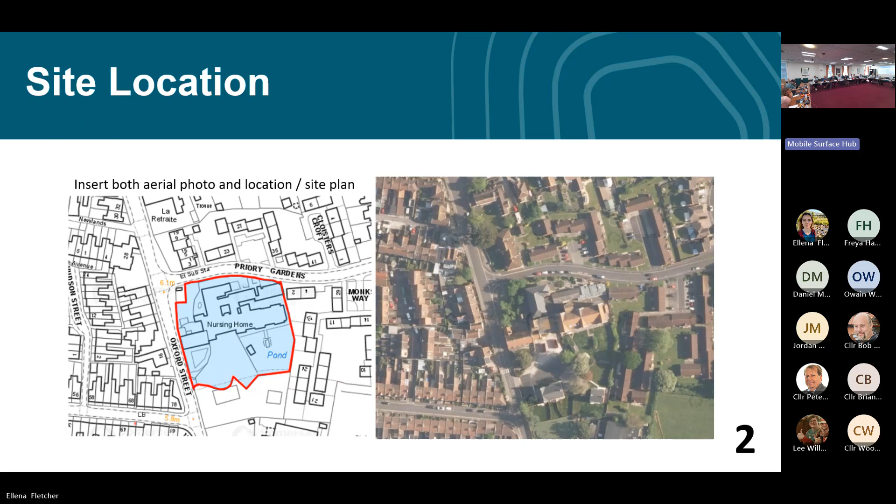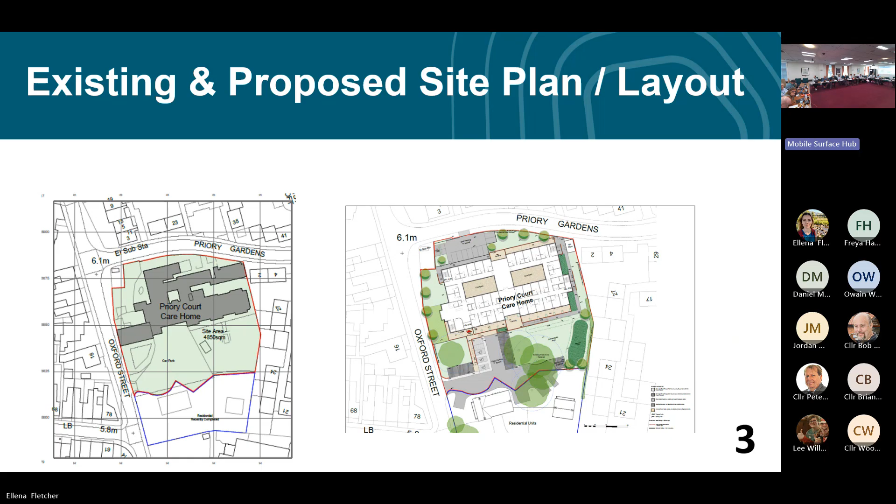This slide shows the context of the site as a reminder. It's within the town centre of Burnham-on-Sea, surrounded by a number of residential properties. As you can see, the aerial to the right indicates the existing buildings on the site and the surrounding properties. And again, the plan on the left indicates the existing footprint of the existing buildings, and the proposal is the plan on the right-hand side.

Now, these slides are the slides that have been really helpfully provided by the applicants. So I'm going to just run through them so that you can see what's been shown as existing and what's being demonstrated as how the proposal incorporates some of the existing features.

In terms of windows, the existing windows include a vertical emphasis with varying transom and mullion arrangements with stone and brick header details, stone sills and varying dimensions and proportions. The proposal, on the bottom of the slide, includes, again, vertical emphasis in the design, contemporary arrangement of transoms and mullions to suit natural ventilation and daylight strategy. It includes cast stone header details and cast stone sills as part of a band course.

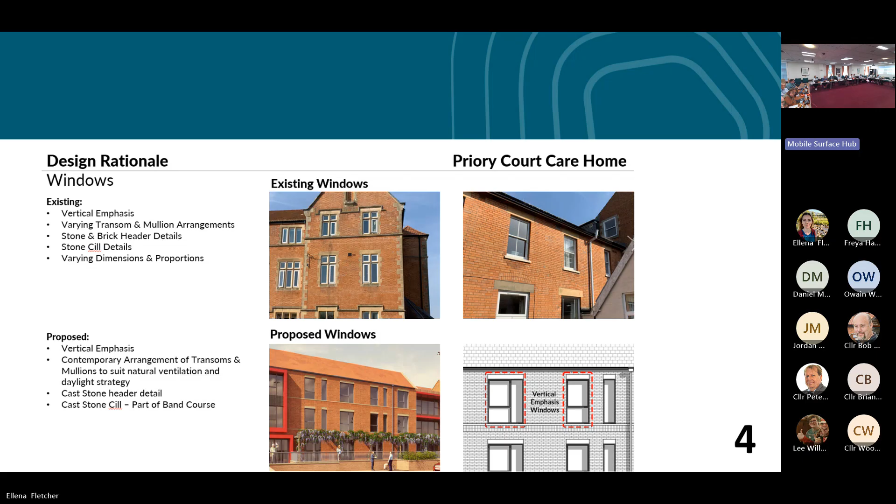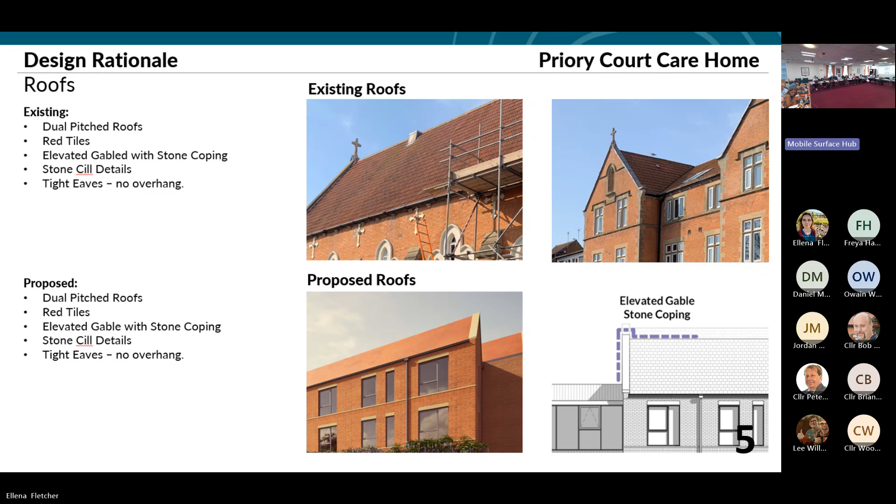The next slide indicates the roof designs. Existing designs include dual pitched roofs, red tiles, elevated gables with stone coping, stone sill details and tight eaves, meaning very little overhang of eaves. What is proposed is dual pitched roofs, red tile, elevated gable, stone coping, stone sill details, and again, tight eaves.

In terms of wall and fenestration details, existing, we have projecting stone band courses, stone quoins, brickwork soldier headers, Flemish bond style brickwork with coloured mortar, ecclesiastical details to the chapel. What is proposed incorporates projecting stone band course, brickwork soldier course, stone headers to windows and Flemish bond brickwork with coloured mortar.

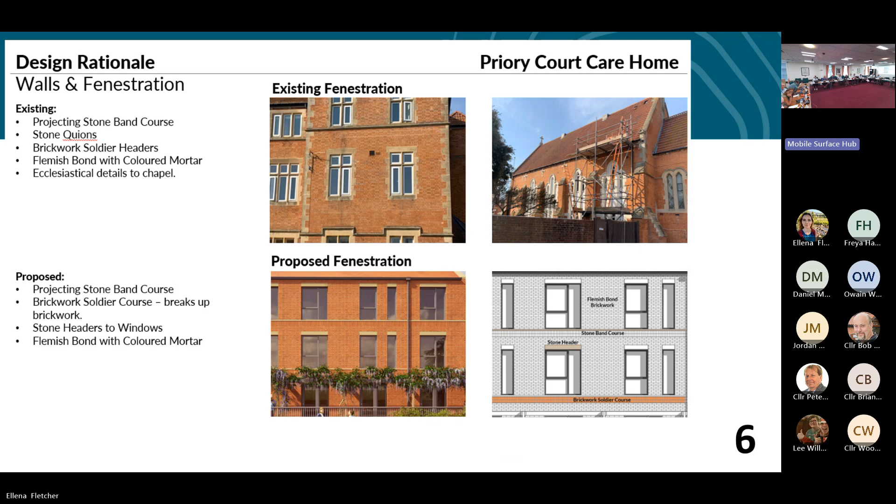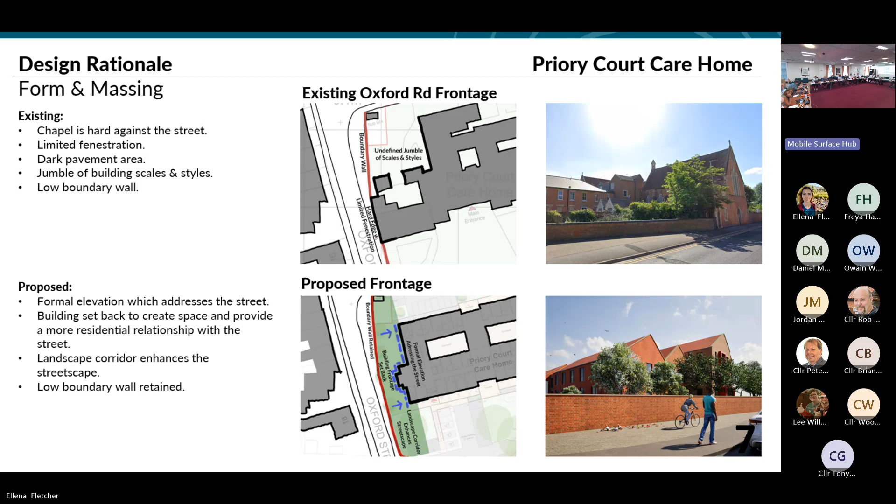In terms of form and massing, the existing indicates the chapel being close up against the street with limited fenestration, dark pavement area, a jumble of building scales and styles with a low boundary wall. The proposal incorporates a formal elevation which addresses the street, building setback to create space and to provide a more residential relationship with the street, a landscape corridor to enhance the streetscape, and a low boundary wall to be retained.

In terms of the form and massing of the elevations, as you can see at the top, the existing incorporates a south elevation arranged into three main sections. Gables are prominent features, and there's relief and shadow across the elevation. What is proposed incorporates an arrangement of three sections with street elevation including prominent gable features. The gables are arranged with low eaves to reduce mass and impact. The valleys are kept higher to allow for servicing. Setbacks across the elevations create shadow and depth, and material variation helps break up the facade.

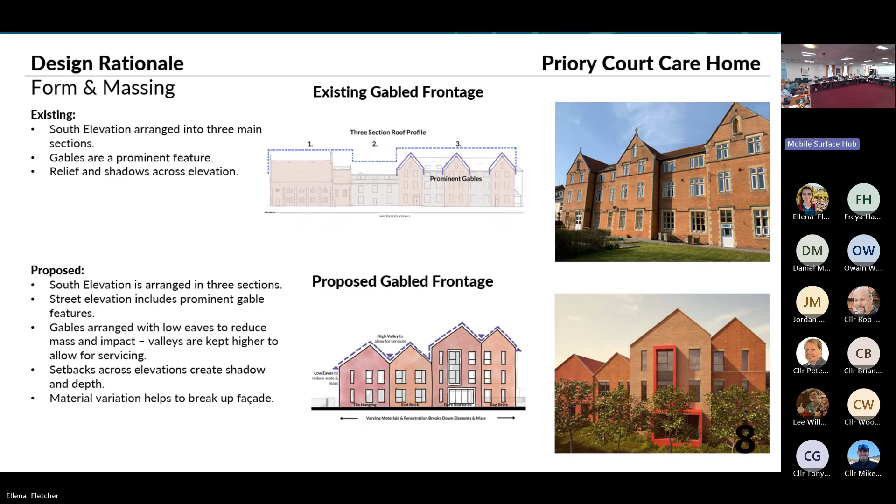Given the details proposed and given the proposal as previously recommended, it is considered that the design features incorporated in the scheme are acceptable, and the recommendation is to grant consent as was previously recommended. Thank you, Chair.

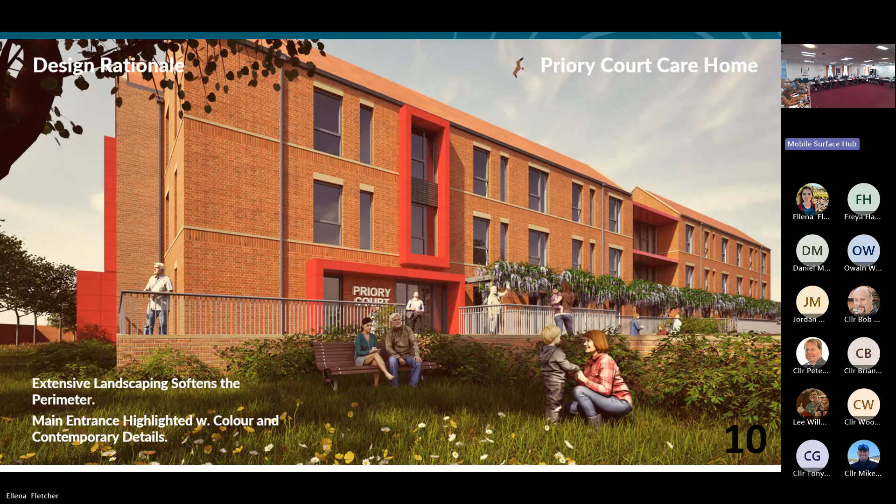Hello everyone, my name's Owain Wynn and I'm speaking on behalf of the Diocese of Bath and Wells. We own a property in the newer houses that were built, 17D. Our main concerns are to do with the loss of the historical character of the area, detrimental impact during demolition from dust, noise and pollution, inadequate parking due to the number of people who will be living there, working there, and visitors. There's also the overall impact on all the neighbouring houses, and some issues with the whole development regarding principles that the council generally have on developing. There are multiple issues at the moment with the security on the site and how the site has been managed.

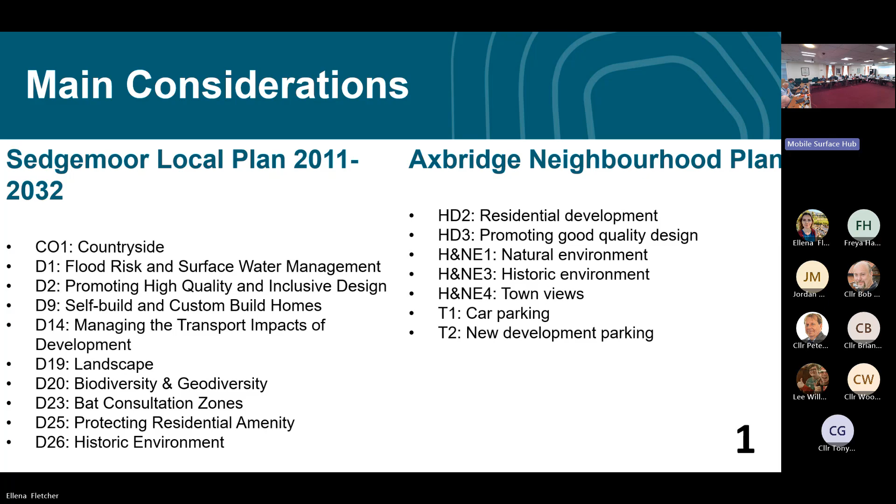So this is the list of the relevant local plan policies. There is also a neighbourhood plan in Axbridge as well, and these policies are relevant. There are also some supplementary planning documents relevant to this scheme, and also the main planning considerations that we are going to look at in the presentation.

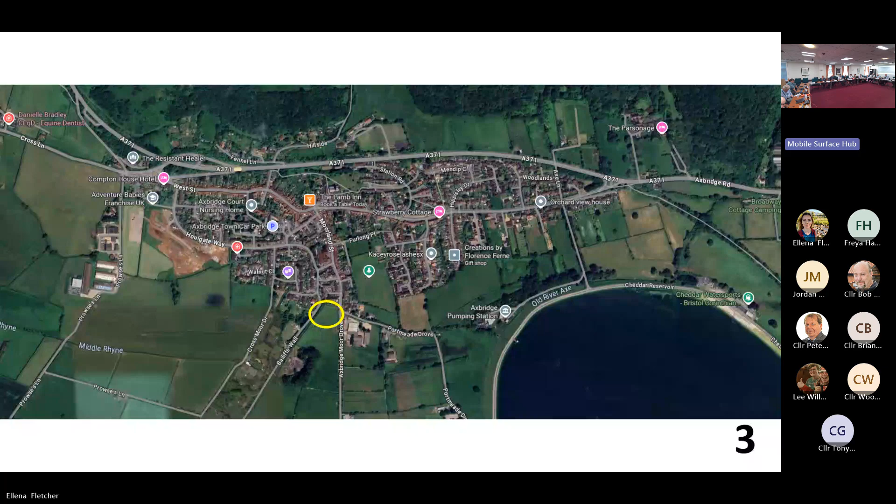So the application site is to the south of the main built-up area of Axbridge. The site is currently an agricultural field with vehicular access onto Axbridge Moor Drove, which then connects to Moorland Street in the north, which is an adopted road just above where that junction is.

The application follows a previous refusal for a self-build dwelling at the site. The previous scheme was refused for one reason: that by reason of its size, scale, detailing, roof forms and material finishes, it would result in a visually dominant and incongruent addition to the detriment of the character of the area, the setting of the rights of way, and would not be considered a complementary design.

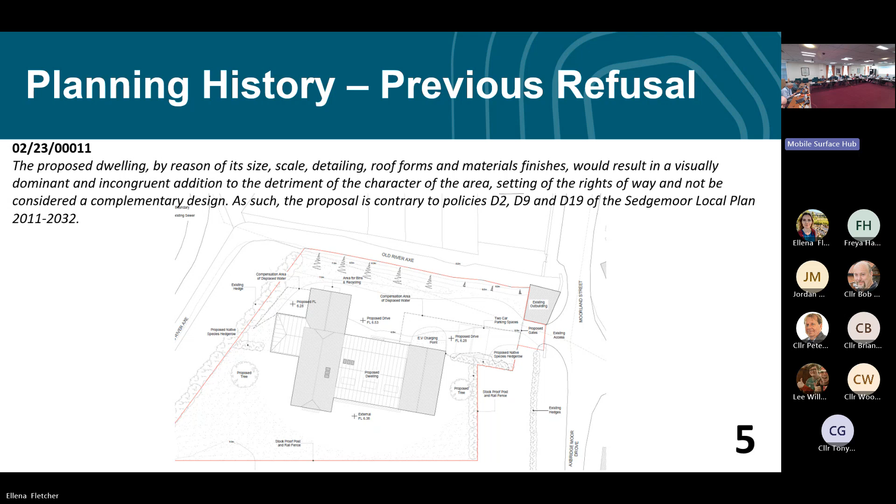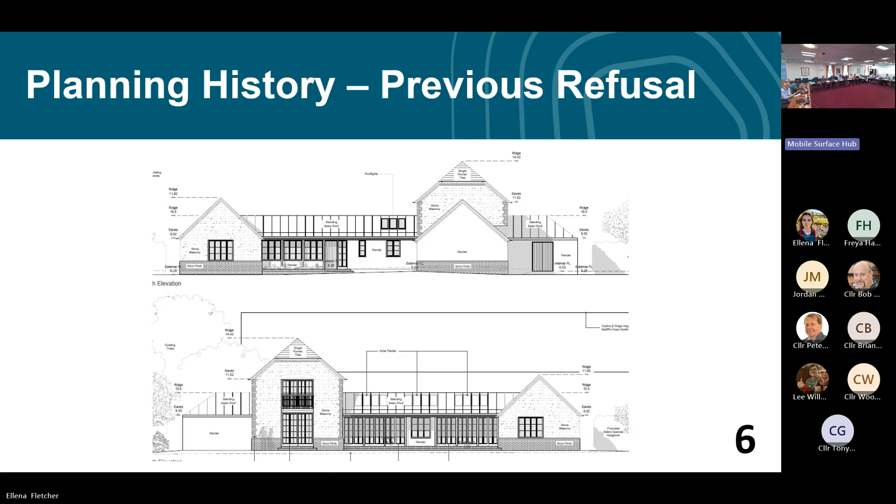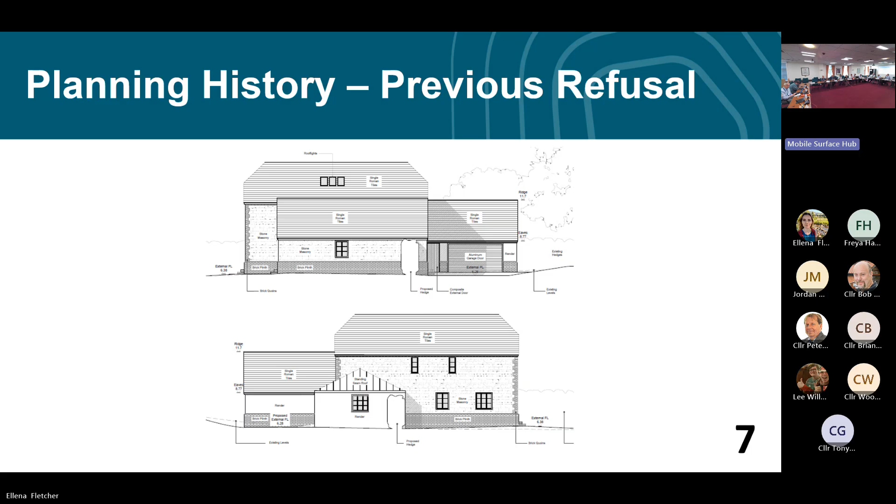So that is the site plan of the refused scheme, and these are the elevation drawings of the refused scheme. As you can see, it had a variety of different roof types and materials. Those are the other elevation drawings. So that's the history of the scheme, and like I say, it was only refused for one reason relating to design.

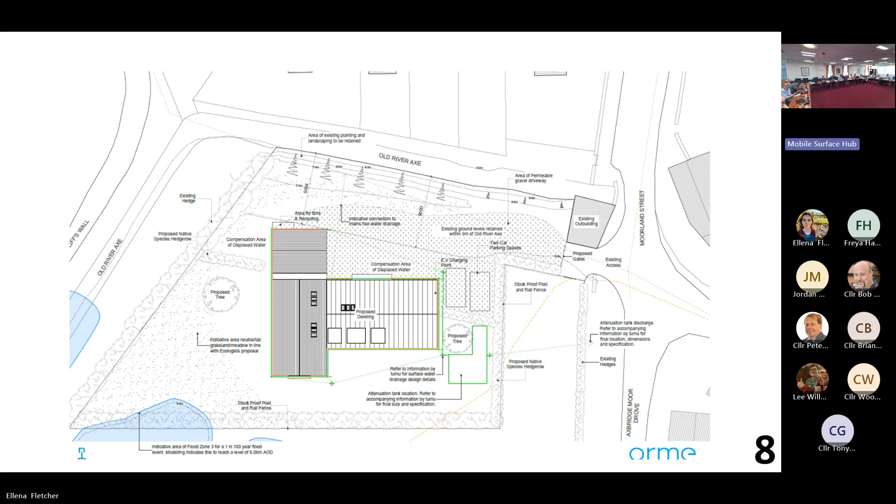So we now move on to the current proposal. It's for the erection of a detached dwelling to be served by the existing vehicular access. The proposal also includes the planting of a native species hedgerow with post and rail fencing, and the scheme also provides an integral garage and solar panels to the roof.

So the scheme proposes a part two-storey, part single-storey dwelling with no first floor windows to the north elevation. The walls are proposed to be finished with render and stone masonry, with the two-storey element finished with double Roman roof tiles and the single-storey element finished with a standing seam roof and roof tiles to the garage element of the scheme as well.

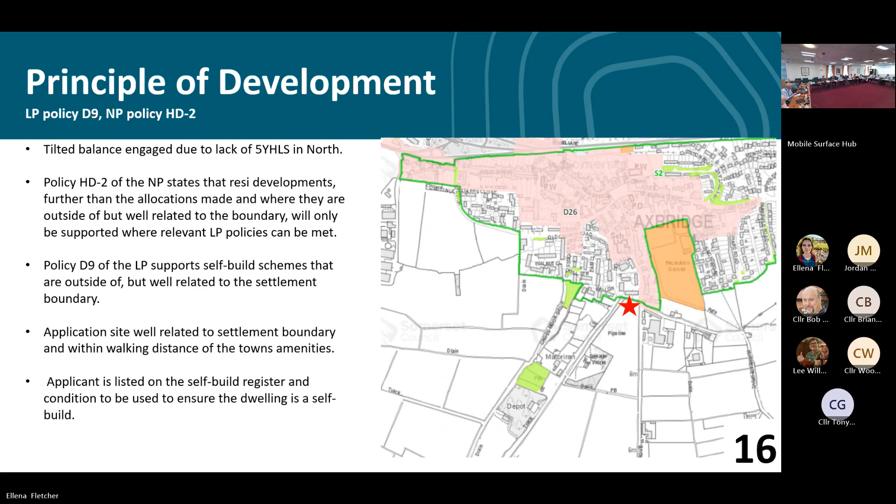It is also worth noting that for sites well related to Tier 2 settlements, there's no requirement to demonstrate a local connection. So the condition would be worded simply to be for a self-build dwelling. It wouldn't have that extra prescriptive element that we sometimes add, because it's not required on this scheme.

We then move on to design and visual amenity. Concerns have been raised that the proposal would impact the view of the town from the south. There are protected views set out within the neighbourhood plan, however the application site falls outside of these.

Whilst there is open countryside to the south of the site, there is residential development in all other directions. It's considered that when viewed from the south, the site would be seen in the context of the main settlement of Axbridge, as it is adjacent to the main built-up form of the town.

The proposal is part 2-storey, part single-storey, and due to the size of the plot and the varying roof heights, it is considered to be of a suitable scale and massing that would not result in an over-dominant addition that would be detrimental to the character of the street scene of the surrounding area.

Considering the material finishes, these are both contemporary and traditional and are considered to be complementary to the existing character of the area. A condition is proposed to require the submission and approval of the materials to be used. Considering the previous refusal, which related to visual impact, it's considered that this is now overcome due to the reduced size and scale of the proposed dwelling, along with a simplified roof form and a more limited range of material finishes.

Moving on to consideration of residential amenity, in respect of future occupiers of the proposed dwelling, the proposed accommodation is compliant with national space standards, and all habitable rooms are shown to be served by adequate levels of natural light. A private external amenity space to serve the proposed dwelling is also considered to be of a size and layout that is conducive to convivial use.

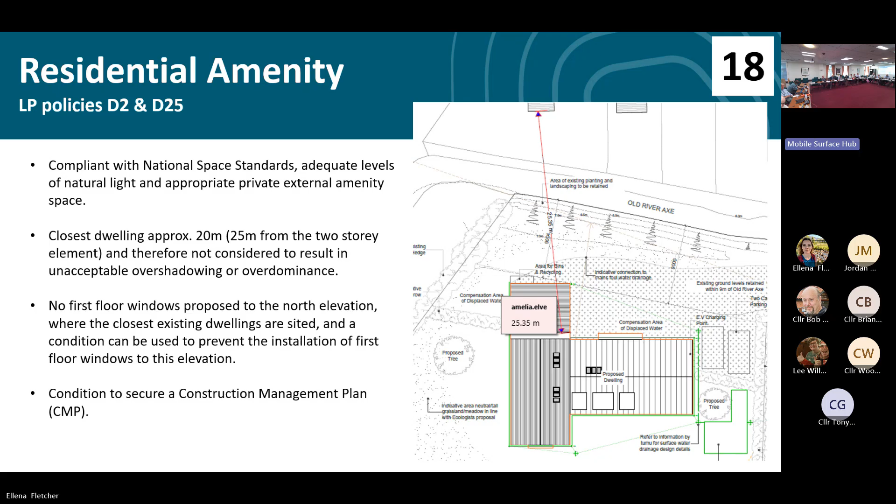Additionally, due to the proximity of the application site to existing residences and concerns that have been raised by third parties, a condition is proposed to secure the submission and approval of a construction management plan prior to commencement of development.

Considering the historic environment, the application site is within an area of high archaeological potential. Southwest Heritage have been consulted on the proposal and no objection has been raised, as it's considered that the proposal has limited or no archaeological implications.

The Axbridge Conservation Area, shaded in pink on that plan, lies to the northeast. The built form of the proposal is located approximately 30 metres from the edge of the conservation area, and given this distance and the scale of the development proposed, it's not considered that the proposal would have an unacceptable impact on the protected area.

Moving on to ecology, a shadow HRA had been submitted as the site is within the Band B consultation zone for the North Somerset and Mendip Bats Special Area of Conservation. The shadow HRA sets out that the loss of the improved grassland to provide the proposal is not significant for horseshoe bats. For the purpose of the assessment, it was assumed that the site is used by bats for foraging and commuting purposes.

This was because there was an absence of this information within the submitted details, so they assumed a worst case scenario that the bats were using the site. It's been assessed that the existing hedgerows are suboptimal for bat flight lines and therefore would need to be enhanced and maintained accordingly. Additionally, there's the potential that any external lighting could disturb bats.

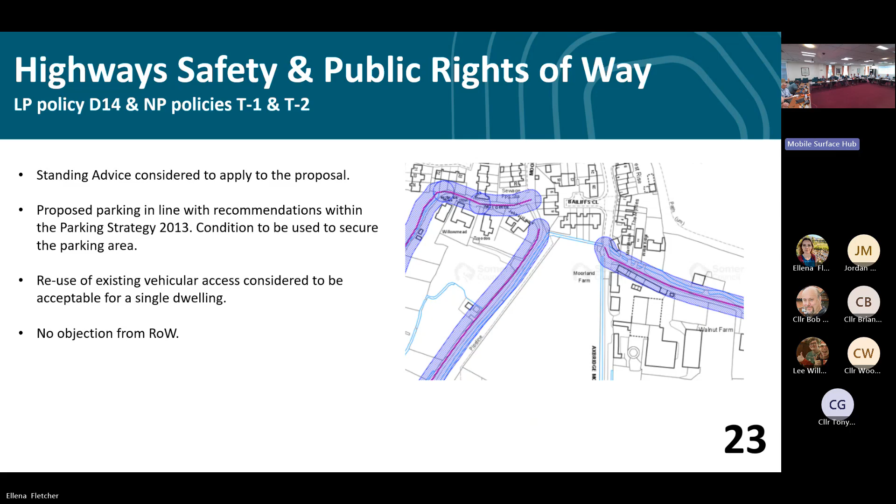There is also a public right of way to the east and west of the site, as shown on this plan. The rights of way officer has been consulted and has raised no objection to the application.

Considering the planning balance, the north area does not have a 5-year housing land supply, and therefore the tilted balance is engaged. This means the consideration of the planning balance is tilted in favour of granting planning permission, unless there are adverse impacts that significantly and demonstrably outweigh the benefits. That is the wording in the NPPF.

The principle of the development is considered to comply with the relevant policies of the local plan, and there are no objections from key consultees. The previous scheme was refused for one reason, relating to size, scale and detailing, and it's considered that the amendments made now overcome these previous concerns.

It's also considered that any mitigation required can be secured by planning condition, and it is therefore the officer's recommendation to approve planning permission. Thank you.

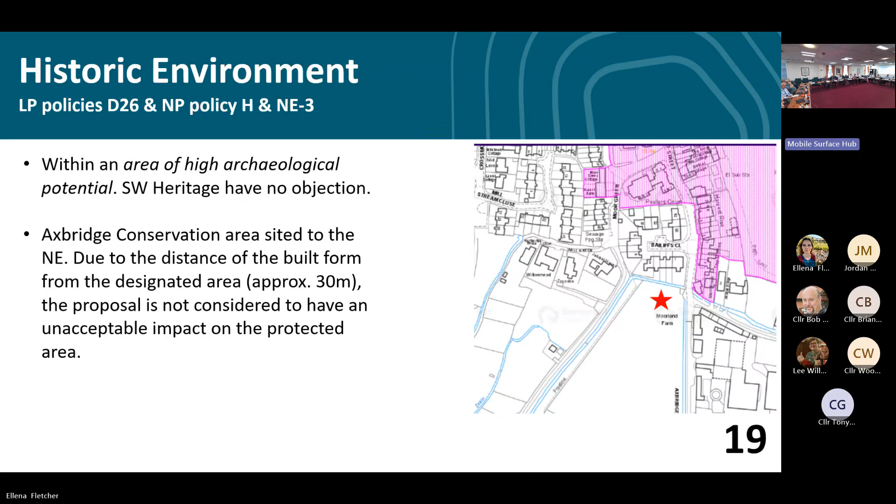The site is designated as being in flood zones 1 and 2. Regarding impact on area and neighbours, the proposed dwelling, even with the amendments, is still of a significant size in comparison to the surrounding dwellings. This one property would run behind approximately 4 or 5 dwellings on the south side of Bailey's Close. The scale of the proposed development is not appropriate and not in keeping with the surrounding area, having a detrimental impact on the area, neighbours and landscape.

Regarding traffic generation and road safety, the local school is in Moorland Street, and the site is at the end of this road, which is narrow. Moorland Street already suffers from traffic congestion, parking issues and road safety concerns. The proposed development will exacerbate the situation.

Regarding the environment, the development will not enhance the natural environment, landscape, biodiversity and habitats, and will impact on wildlife, especially bats. It is within Zone B of the Bat Consultation Zone associated with the North Somerset and Mendip Special Area of Conservation.

In summary, the initial application was refused by Somerset Council due to the design and appearance of the dwelling. This included the size and scale of the proposed dwelling, which would be visually dominant and to the detriment of the character of the area, the setting of the rights of way, and not of a complementary design. Axbridge Town Council objects on the grounds given and considers that the proposed dwelling, by reason of its size and scale, remains detrimental to the character of the area.

There is no reason to build outside the planning line. The council respectfully requests that the application should be refused. Thank you for your time.

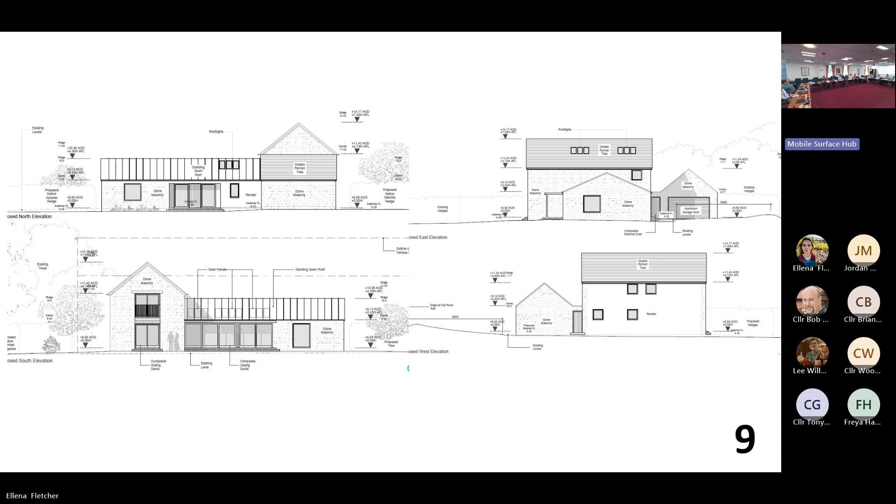Flood zone 1 is the least likely to flood. Flood zone 2 is the next. Flood zone 3, which most of us in the old former Sedgemoor area are in, is the floodplain. Generally we're trying to say there's somewhere you're looking for somewhere comparative, so we're comparing some things on flood zone 1 and 2. The vast majority of the old Sedgemoor area is flood zone 3, and then we get into the whole thing of 3A and 3B, where this committee has gone around in circles on those. But generally 1 and 2 are the areas less likely to flood. I noticed 3 is not very far away, but they've kept it out of 3, and that's where we're normally looking for flood zone issues. If we're in 3, 1 and 2 are the preferable areas generally.

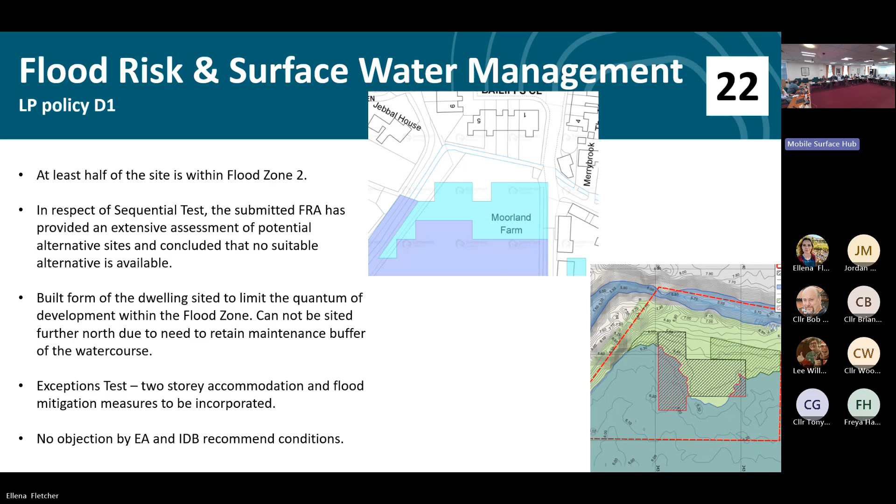Councillor Wells: Could it be possible to see either the plan or the photo of the properties on the north, east and west of this, further out of Axbridge than apart from the south side, I think, which is not the view to the country. Could you see that? Yeah, of course, yeah.

Yeah, that's fine. I mean, it appears as though this is generational ribbon development almost out of Axbridge, these buildings on either side of this site. Would you say that's the case? I would say that the proposal isn't in a particularly isolated location. There is a residential development which is further away from the boundary than this one. Yeah, thank you.

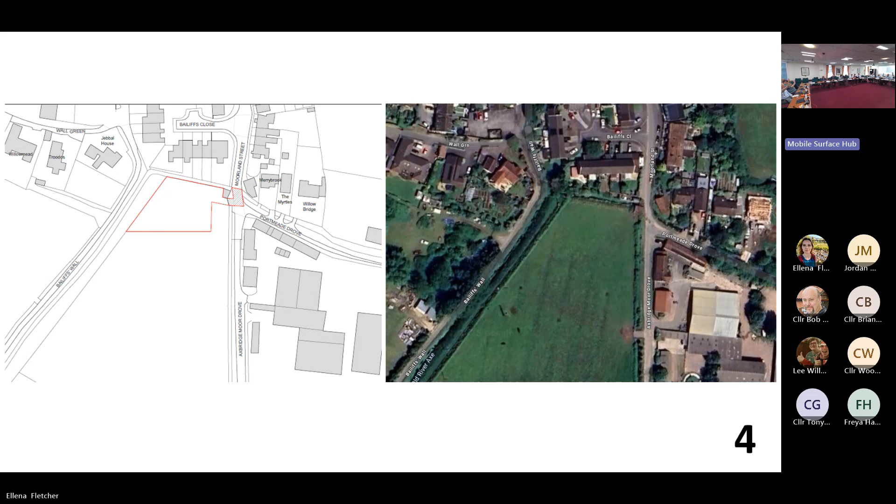Thank you. So we've got a proposer and a seconder to agree the officer's recommendation to grant permission. All those in favour, please show. And that is unanimous, I believe. Yes. Okay. Thank you, members.

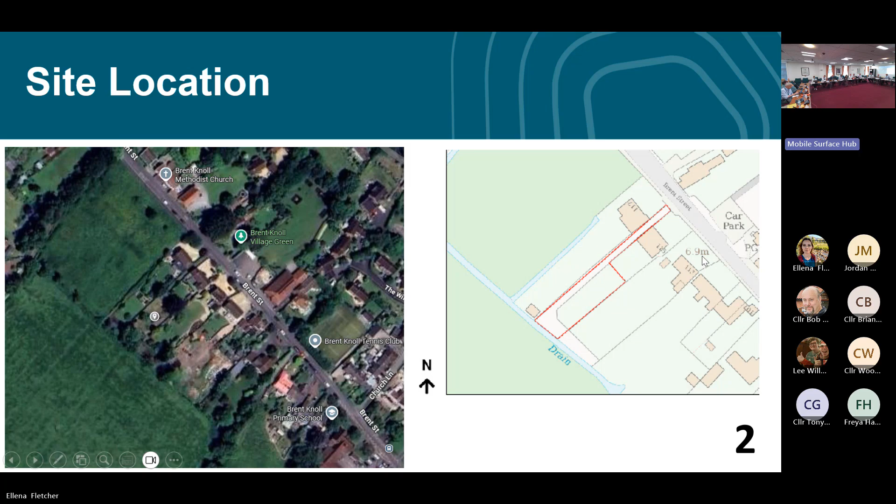The site is also adjacent to a number of plots which have also been granted planning permission, notably to the backs of 111 and 113 Brent Street. In total, there have been 3 permissions granted on land south of these properties as well, with access coming off of Brent Street, which is consistent with the proposal we have today.

So this is the existing site plan here. Since the previous permissions were granted, the site has been sold. The property to 115 has been sold to the front of the site, and the plot here is still within the ownership of the applicant, as was previously granted consent in the past. So what was the former garden area of 115 is now the application site.

The proposal is shown on the right hand side here, which has a detached 1.5 story dwelling. So it has accommodation within the roof with a projecting gable to the rear elevation here. Access will come from Brent Street, which is along the existing access route from the highway to the north. These are the proposed floor plans.

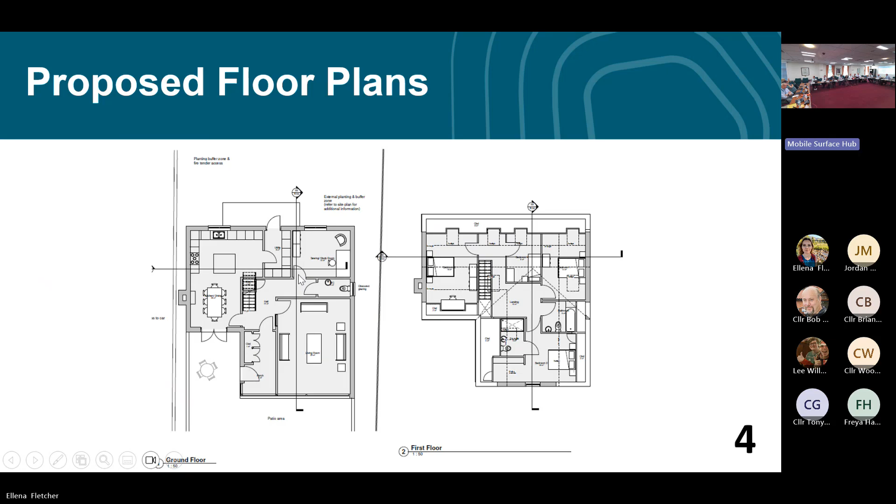So in terms of the differences between the previous permissions, this one does include an extra bedroom within the roof of the property. But by and large, the L-shaped footprint and the appearance are all fairly similar to that which was previously proposed and approved.

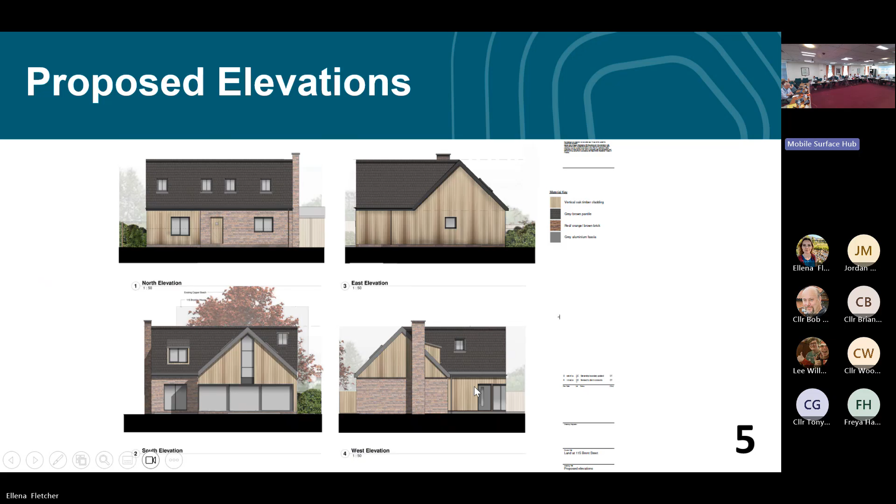And again, this is all fairly consistent with the previously approved schemes, which were granted in 2017 and 2020, but neither of which were implemented. There will be use of brickwork and vertical timber cladding, all of which, again, are fairly consistent.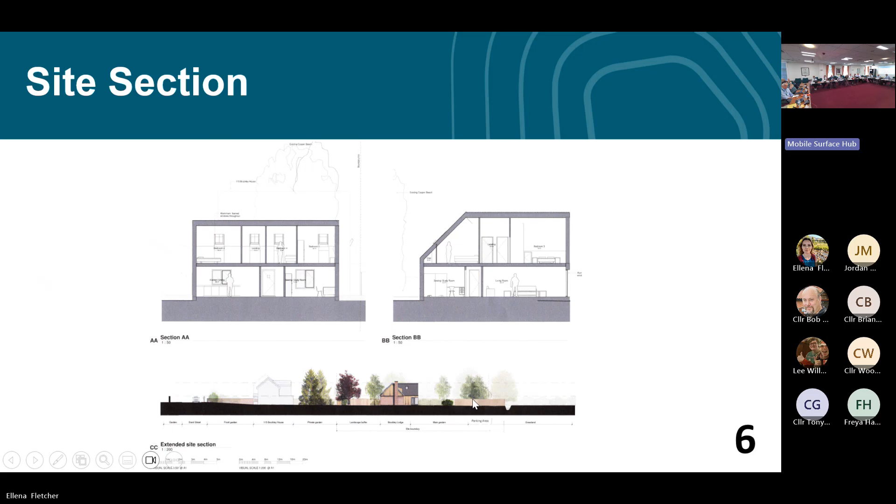This is a site section, just showing the distance that we'll have between the proposed dwelling here and the existing dwelling to the front of the site, with Brent Street located here. So the access will come along the side between 115 and 117 to the rear of the site as it is at present. And this will provide the area for the garden and parking area, which will be located to the south of the property and will provide parking and turning for the proposed dwelling.

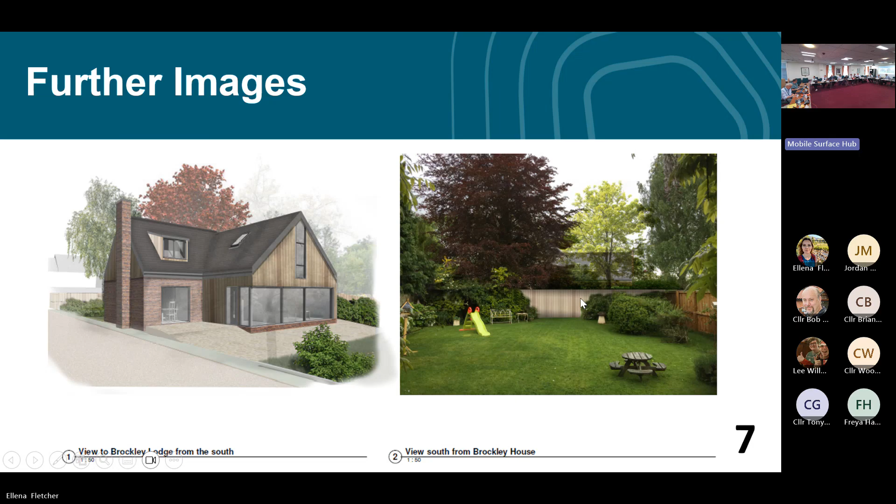These are some 3D images of the proposed dwelling. So you've got the access on the left-hand side here, with the patio area and garden to the south. This is a view taken from Brockley House, 115 Brent Street, which shows the existing landscaping which should be retained, providing a screen there. There will be a distance of approximately 30 metres between the proposed dwelling and the rear elevation of the existing dwelling to the north, which is considered to be acceptable in terms of overlooking and will maintain the privacy and amenity of both properties should construction be approved.

There is a slight change in the size of the property, resulting in the width becoming 1 metre wider, and the projecting gable at the rear being 2.4 metres further back into the site. However, it's fairly consistent with what was previously proposed, and it still provides a garden space and parking and turning area appropriate in scale for the use of the property and the number of residents expected to occupy it.

During the course of this application, due to concerns raised by the Internal Drainage Board, the previously permitted and proposed carport has been removed from this scheme, and it's now an open space for parking and turning at the rear of the site. It's not considered this would have an impact on the visual amenity of the area.

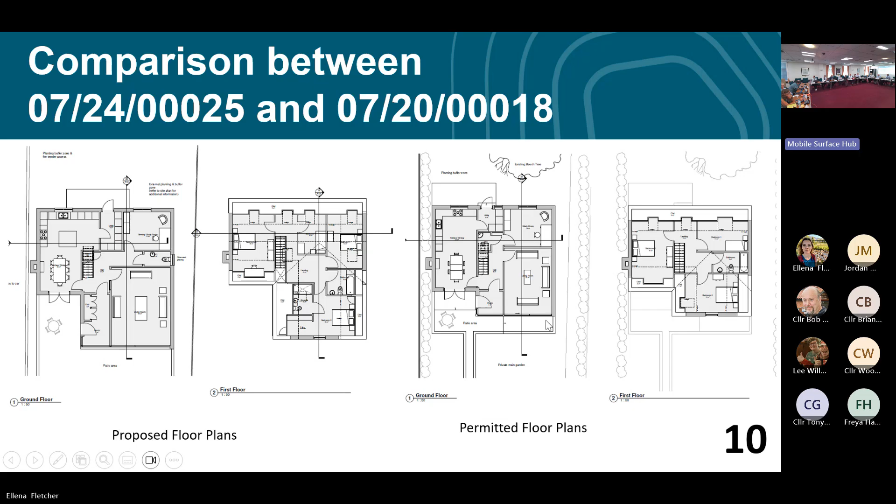Again, this is a side-by-side comparison between the proposed and the permitted schemes we had in the past, taken from the most recent scheme in 2020. As you can see, there is a greater depth to the rear of the property with the gable projection at the back, but it's considered this impact will be minimal on the surrounding area.

In terms of the planning balance, the principle of development is established through the permissions granted in 2017 and 2020. While there is a slight increase in the size of this scheme compared with those that have gone before, it's not considered this will result in overdevelopment of the site or a visual impact on the surrounding area or amenity of the village itself.

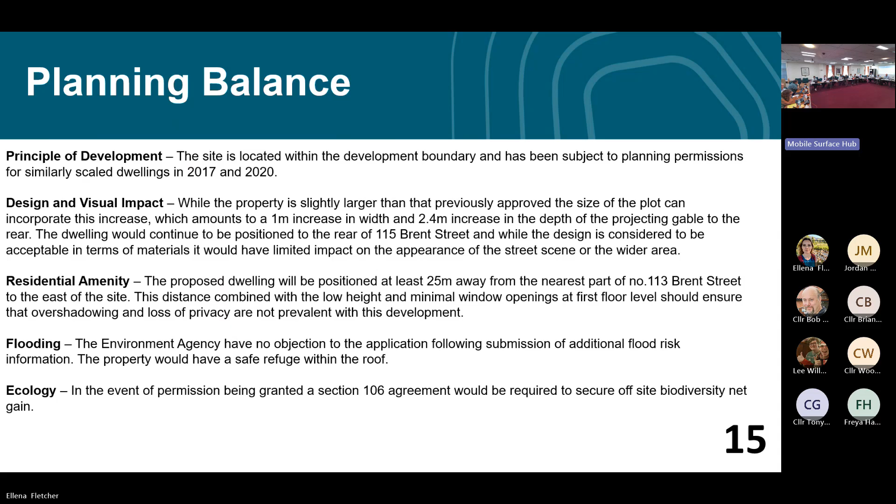With regards to the sequential test, this is deemed to be passed as it is within the development boundaries, and the Environment Agency have no objection to the scheme following submission of further information relating to flood risk. The recommendation is to grant consent subject to a Section 106 agreement being drafted and completed in relation to the provision of off-site biodiversity net gain, as the submitted information deemed that on-site provision would not be achievable within the scheme as submitted.

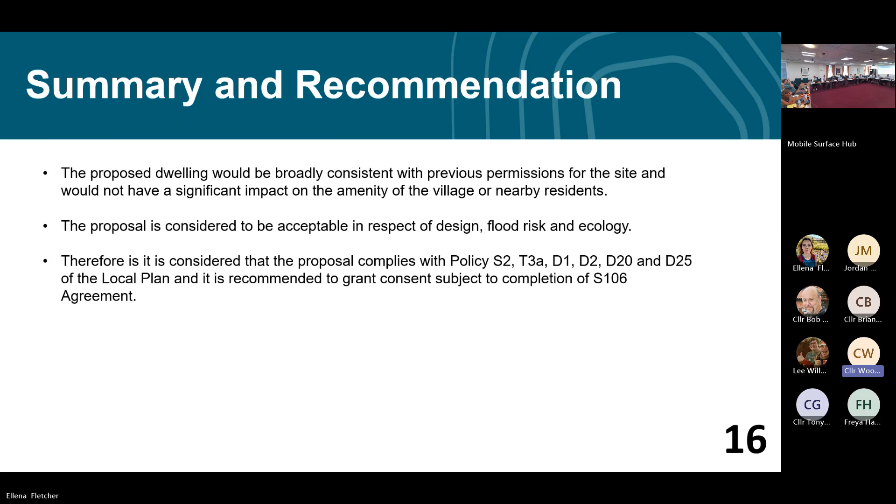The first issue is overdevelopment of the area. We've had a number of properties in the area built behind, and ultimately the cumulative impact of these developments is placing undue pressure on the area. So we're talking about 115. There's been significant development, I think at 111 or 112, just a few doors down.

Sorry, can I just stop you there? We did lose you for a few seconds. Oh, I'm so sorry. I will try and speak slower and clearer and hope it's just not my line. I don't want us to miss anything you've said. I'm inclined to say, would you mind starting from the beginning again, please? And hopefully we'll get through it this time. All right, absolutely, that's fine.

So I will put my comments in the chat as well, just in case. So, I am objecting on behalf of Brent Knoll Parish Council. The main reason is the overdevelopment of the area. We've had a number of applications in the vicinity which the council, Somerset Council, have approved, and that's led to quite a lot of pressure in the area on overdevelopment.

There's also some concerns about highway safety. We saw an image earlier of the access that would be for the property. It's not particularly wide, and it is nestled between two properties. As someone who lives on Brent Street, it's quite tricky to get in and out onto Brent Street, especially as it's quite busy that end, near the school. So we have concerns over highway safety issues.

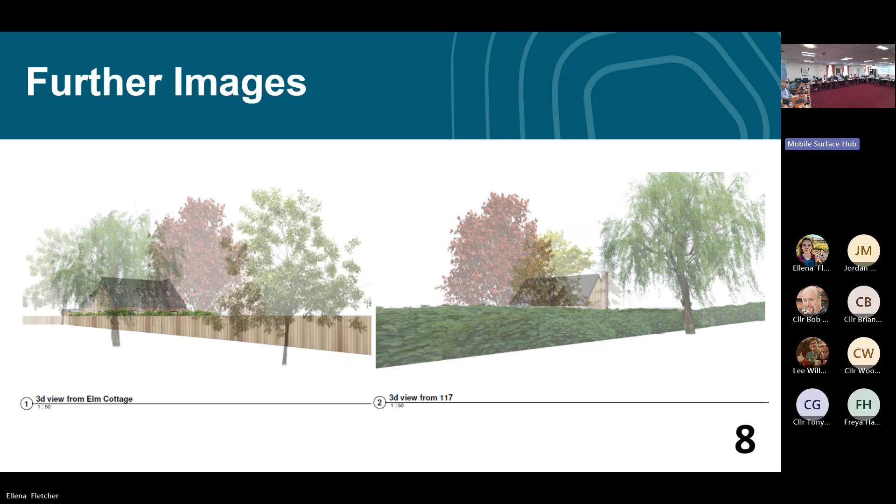When you take a look at the street scene, it's not going to be a highly visible structure within this streetscape. And even if it was, I think the design itself is of a character and materials that would be appropriate. I don't think it would have a detrimental impact based on its scale and design.

In terms of the distance as well, even without that landscaping buffer, which is obviously still there at the moment, the impact on the neighbouring property to the north, I don't think would be significant enough to warrant refusal based on overlooking, given that it will be 30 metres away. So in that respect, I think that's covered by the design and layout that's been submitted.

In terms of construction, it's one dwelling. The applicants indicated that they bought the access to the lane, they have ownership over that now. Based on the scale of the development for one dwelling, it's not considered there would be a significant impact for a prolonged period which would be detrimental to residential amenity.

Whether members feel strongly enough about that to add a condition, that could be an option, but as officers, based on the scale of it, we feel it wouldn't be necessary in this instance. All the other points covered by the Parish Council were fairly consistent with their response during the course of the application, and have been covered in the report as well.

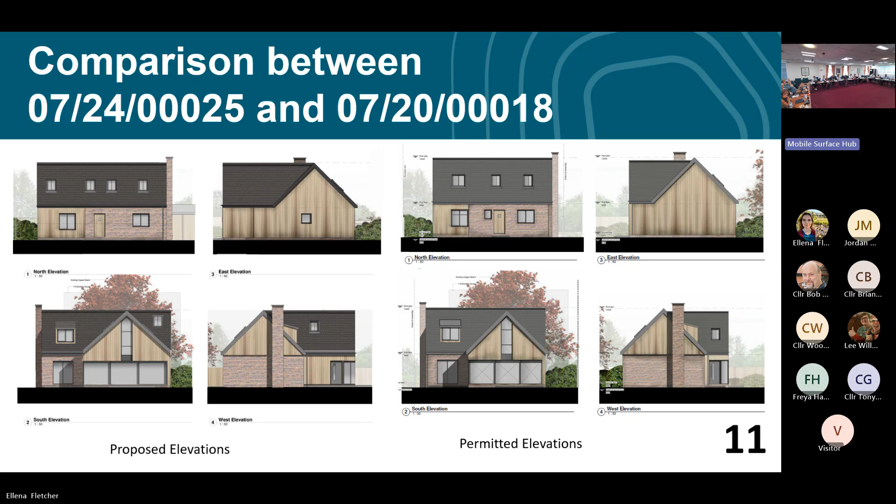I have absolutely no problem with this whatsoever. The entrance and exit you just got on the screen now, I was standing outside there having a look at it yesterday. It wouldn't make the slightest bit of difference, absolutely nothing on the highways for cars to come and go from there, because there's a house on one side, a shop on the other side of the road, and properties across the road. Makes not a jot of difference, it can only be one vehicle at each vehicle movement. So no problem with that whatsoever.

I'm totally in favour of this, but I would, if it was passed today, which I think it should be, ask as a condition of consideration that the large tree in the corner be retained. But for now, for this moment, thank you. Thank you. Liam, would you like to respond about the tree?

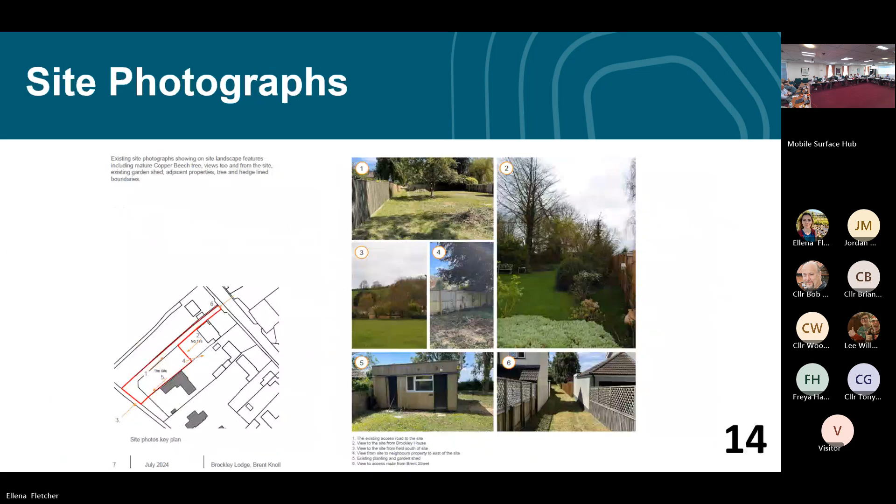We have a broad landscaping scheme here on the screen in front of you now. Oh, if I get the larger one, I'm sorry. There we go. Which shows the existing and proposed trees that would be retained.

We could impose a landscaping condition that would firm up the retention of those. I think we'd be a bit reluctant to put a retention condition on the tree as such, because that would effectively be a TPO, and I don't think it would meet the criteria for a TPO in terms of its importance to the local vernacular or whatever that criteria is. So we might be going down an unreasonable route in terms of requiring it to be retained.

But if members felt strongly about the landscaping and having it retained to establish itself, then certainly that could be an option. But again, based on the plans that we have in front of us, there does seem to be an indication that there would be sufficient landscaping and trees to assimilate the development into the site and maintain the character of the area.

Thank you. Do you wish to come back, and then Councillor Filmer, and then Councillor Martin? Okay, one very quick thing. I wish to withdraw my statement about the tree then, because now you've explained it, how you've explained it. My asking for a condition that is not relevant, so I'll withdraw that. Thank you, Councillor Filmer.

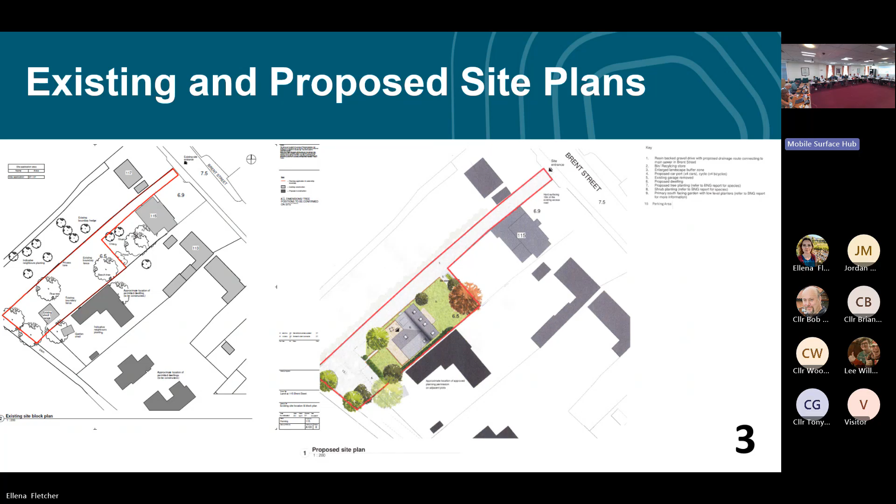Just as my colleague next to me also, I think in terms of a TPO, we'd be looking at whether it has an impact between the two dwellings. The question is, does it have an impact from the highway and from the footpaths? And I'm not sure we can say, from a position of it being between two houses, that it's not going to qualify for a TPO.

So I understand that. Comments to be made - I can understand where the parish council come from because they're concerned about the increase of the size, but as the applicant has explained, the plot has actually got bigger in terms of the land that they bought adjacent to it, so that does somewhat offset that. The access, again, knowing Brent Street, it's not great coming up on Brent Street, but there was an existing planning permission there for a dwelling anyway, so that's not changing. So I don't think we've got grounds to come back on the highways, whilst it might be a concern.

I would like to support this going for permission, yes, but we talked about a construction management plan. Bearing in mind the proximity of those two dwellings to the access which is going to be used for construction, I wonder whether, bearing in mind the last application was again a single dwelling and we did have a construction management plan on that, we could have something that particularly looks at the hours of operation. I don't think the applicant is going to want to work outside those hours anyway, but it would just be useful to have that reassurance to the neighbours that during construction it's going to be something I'll have to live with.

In terms of the big beech tree, again, I agree we can't TPO it, and to some extent one would hope that, the fact it's between the two dwellings, it's actually of much benefit to the new dwelling as it is the existing dwelling, so I don't think they'd want to lose it anyway.

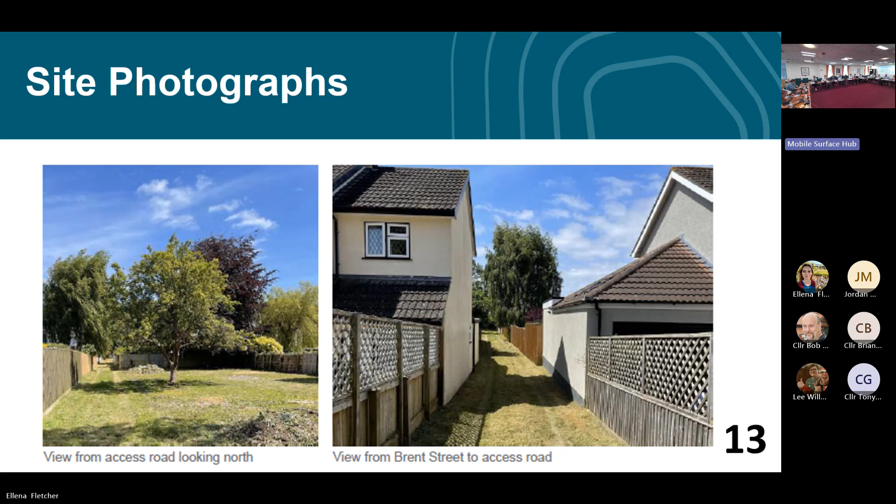Thank you, members. So that's the end of the applications, and we just now go to the appeal reports. Thank you, Chair, that's me. So we have 3 decisions, all of which the appeals were dismissed, which is great news. I've always liked to be able to report positively. First one I'll go to is 59A Broadway.

So this was an application for prior approval for demolition of buildings and construction of one dwelling house. This is an interesting one because it was a proposal under Class ZA, which is conversion from employment use to residential. The inspector actually concluded that the requirements of Class ZA for prior approvals were met, but they took on board the fact that there is a statutory duty under the other legislation relating to protected species. So they basically said that they weren't convinced that the reports that have been provided relating to protected species in terms of bats were in time.

So the survey had been done some time ago, and applying the precautionary principle, the inspector said they couldn't be satisfied that the situation hasn't changed since the reports were over 2 years old, and so refused to grant prior approval on that basis. So it's interesting - we hadn't actually, as officers, refused on that basis, but the inspector, and this is a good example of showing that actually when an inspector considers a planning appeal, they're not duty bound to just go with what the officers have put forward or what the council has put forward. They assess the application afresh and then note their duty under the Habitats Regs and refuse that one. So interesting one from my perspective.